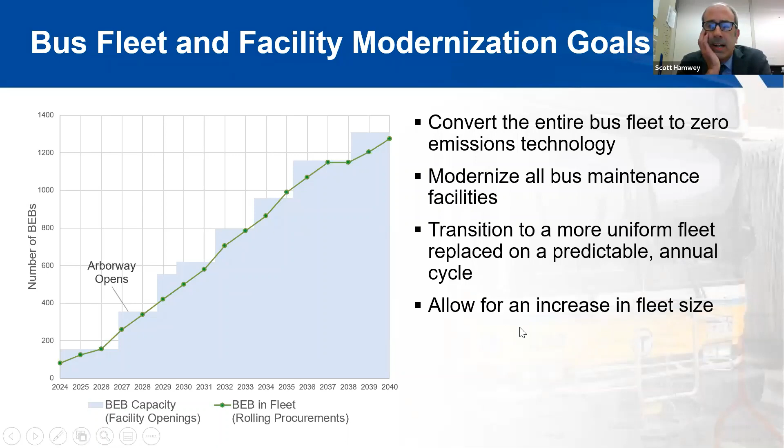So if we go to our next slide, we'll talk briefly about that electrification strategy. We're really excited about this, we're proud of it. It's one of the most aggressive bus electrification strategies in the nation. Like nearly all of our peers in North America, we've identified battery electric buses as the vehicle technology that's going to get us there.

What is this going to mean for the communities we serve? It means an almost total elimination of emissions compared with the CNG or diesel buses we operate today, with only a small amount of emissions in the initial years of this transition associated with the coldest days of the year, when we'll need to complement the bus's electric heating system with auxiliary systems. The MBTA's new renewables-only electricity contract means that 100% of MBTA electricity comes from renewable sources.

And like electric cars that many of you may be familiar with, these vehicles are also going to be much quieter, and that's going to really change the experience of living near one of these MBTA facilities. It's going to be a dramatically improved experience to have us as a neighbor.

If we go to the next slide, there are other ways in which the experience is going to be different than it has been historically. These images show our first project in the program, our battery electric bus facility in Quincy. The facilities we're building are really designed to be fully enclosed modern facilities.

So at Arborway and other locations, you'll see bus storage out in the open, and some maintenance activities out in the open. Those are all going to be occurring inside these new facilities that we're building.

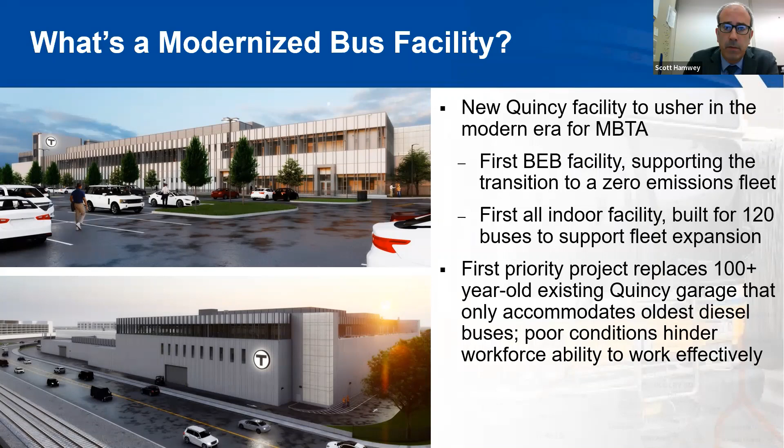So this is a really exciting first step for us, and we think it's really going to help us tell the story of what we're trying to do when we come to other communities like the Arborway community.

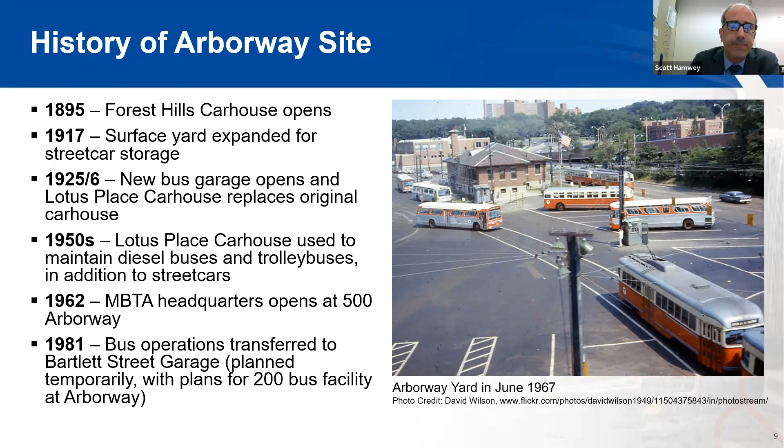So, next slide. The next phase of the history is probably, for some folks on the call, more frustrating than fun for many of you who've been involved. Alexandra and myself have not been directly involved with a lot of this history, but we thought it was important to recognize that we're definitely heading into this effort.

We're leading a project that can benefit from the decades of community interest and engagement that came before us. And also, given that funding proved to be a roadblock to advancing earlier concepts the MBTA had, we think it's absolutely critical that we take advantage of the opportunities presented today, particularly with federal infrastructure funding and grant opportunities associated with vehicle electrification projects.

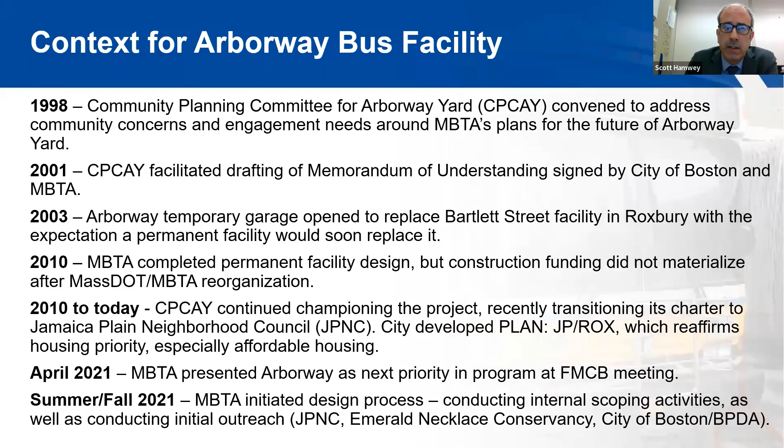The next slide talks about one of the big outcomes of the recent period of history and community engagement around the site: the 2001 MOU between the City of Boston and the MBTA. There were a number of provisions in that document, ranging from fleet size and makeup, parking, as well as the incorporation of the city's former pole yard into the site plan.

Before handing the baton off to Alexandra, I think I have one more slide to do.

So I'll just discuss our preliminary concept—she's going to discuss the site and the building. I just wanted to highlight some of the service impacts of our program for Arborway.

One big change here is we are proposing to increase the size of the fleet at Arborway from the current 118 bus fleet to a 200 bus fleet. In addition, this allows us to replace the current CNG fleet with battery electric bus technology, which will electrify all of the current routes out of Arborway.

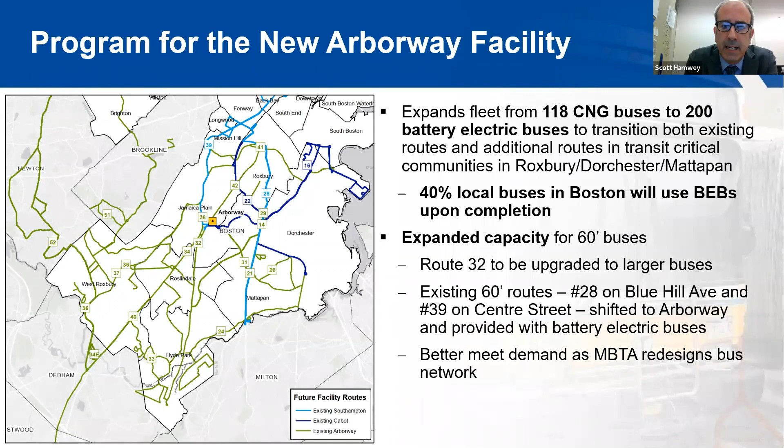So that's my portion of the presentation. With that, I'm going to hand it off to Alexandra to take us through the site plan and the facility itself. Sure, thanks, Scott.

I'll start with an orientation of the existing conditions. The site is split into two parcels, one on the Washington Street side and one on the Arborway side. On the Washington Street side, that's where we house our current CNG maintenance and storage operations. The storage occurs outside and the maintenance occurs in a number of buildings on the northern portion of the site. We have employee parking on the southern portion.

And then in the 500 Arborway site, we have our former headquarters where we still have a couple of functions, including our archive and materials lab. And to the east of our site is Boston's former pole yard, which I believe today functions as a zero waste facility where the community can drop off compost.

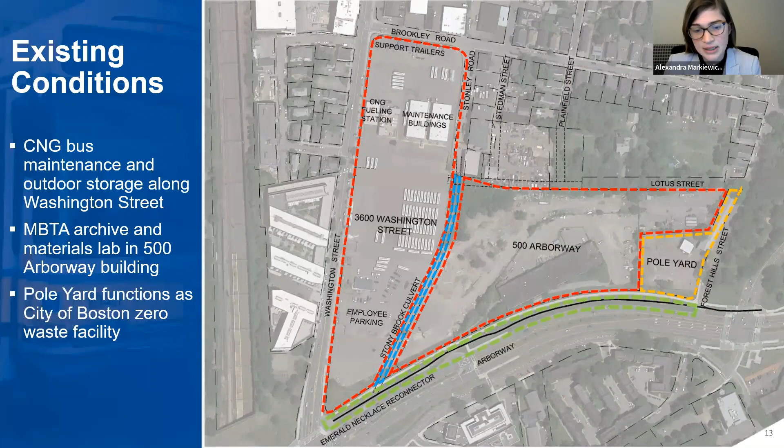There are a number of conditions on the site that serve as constraints or boundaries shaping how we're thinking about this preliminary concept. First, as Scott described earlier, these modern all-indoor facilities are quite different from what we've seen in the past, and they require a significant footprint, generally working best with a large, more rectangular shape. They're challenging to site on odd-shaped parcels.

With our existing site, we see that the Stony Brook culvert bisects the site along those parcel lines. We know we want to avoid building over that culvert because it would be challenging and expensive, and may even require moving the culvert.

We also know that during construction of the new facility, we want to maintain the existing operations so that we can keep buses on the road through the duration of construction. And this Washington portion of the site is the preferred portion for community uses. So that pushes us to looking at the Arborway side of the site for siting our new facility. We found that we need the full length and width of that site, including the pole yard, in order to meet the needs of a modern facility.

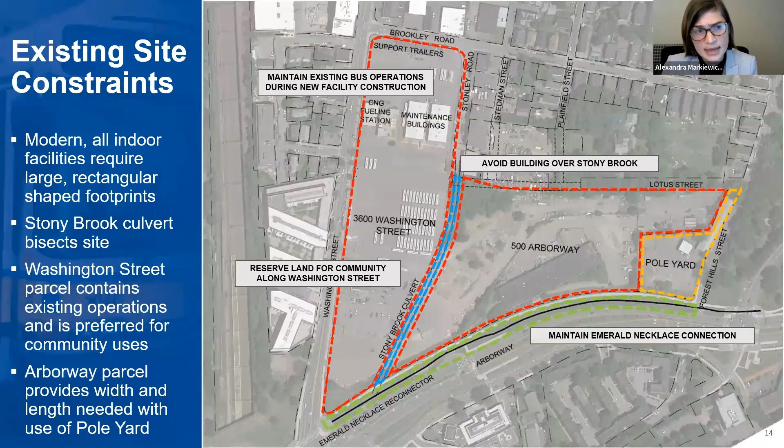Next slide. So over the next couple of slides, I'll talk through what our concept is from a couple of different perspectives, and I'll start with the outside and work our way down to details.

Since we're looking at the footprint on the eastern portion of the site, to the east of the culvert, that opens up a total of 8 acres for community uses that we've identified along that Washington Street portion of the site. We know this is wide enough for a couple of rows of development of different types of footprint that are in line with the types of uses we've seen identified in prior planning efforts, including

PLAN: JP/ROX. As part of this project, we're also planning to construct the Lotus Street extension, also identified in previous planning efforts. It would extend from Forest Hills Street to Washington Street as a two-way public right-of-way with sidewalks on both sides.

And then on the southern side of the site, we're looking at that Emerald Necklace connection that was made through the Casey Overpass project as a boundary as well, to ensure that we can preserve that connection.

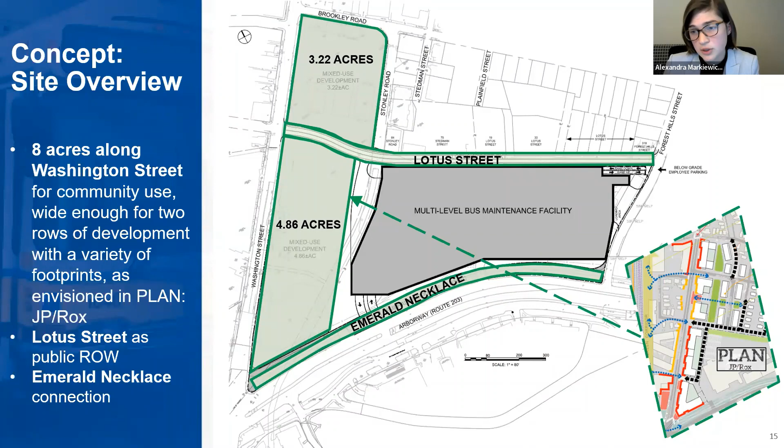Next slide, please. And so looking at our building, we're looking to house 200 buses in a building where we have the footprint outlined here on the slide in this concept.

Though it is quite large, we did work to minimize the footprint as much as possible by putting bus operations on 2 levels and putting all the parking underground, which also meets the MOU stipulation to not have parking on the surface. All operations will be indoors, including the queuing for buses coming in and out of the facility, which gives it this sort of odd, slightly off-from-a-rectangle shape.

We'll look at what that looks like on the inside on the next slide. By doing that, we're able to really maximize the energy efficiency and meet some of our sustainability goals for this building in terms of heating and building operations.

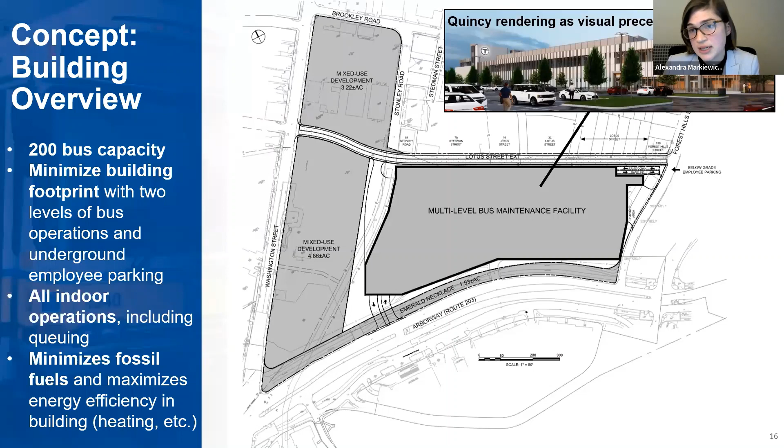We're just at the beginning of design, so we don't have the facade designed yet, but I wanted to pull back this image from Quincy just to show as a visual precedent for what a facade for this type of facility might look like.

Next slide, please. In terms of the interior, we wanted to give folks a sense of the inner workings of this facility, how we would make use of it, and why we need this type of footprint.

The buses would come in and out off of Arborway in the southwestern corner of the facility, and all the operations would occur on a counterclockwise basis, which is best for our bus operations.

They would pass through service lanes on the southern portion of the building, and then we have the maintenance space on the first floor on the eastern side of the building, on the right of the screen, where we'd have pull-through bays for our 60-footers so they wouldn't have to back up, and back-in bays for our 40-foot buses.

And then on the western two-thirds of the building on the first floor, and the entirety of the second floor, which we would have ramps going up and down to, we'd have space for bus storage for 60-footers and 40-footers, as well as the bus charging, which would occur where they're stored.

We're siting the administrative needs for this type of facility—locker rooms, offices, inspectors, etc.—along the northern edge of the facility that backs up to the community there, as well as some additional space for administrative needs along Arborway.

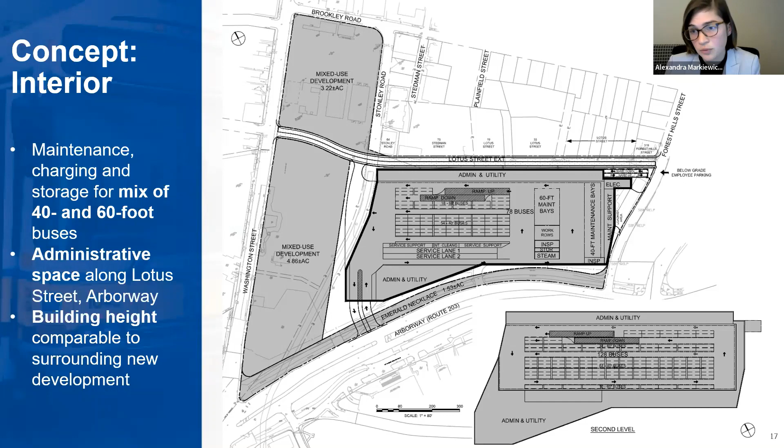So I talked about this a little bit on the prior slide, but in terms of access, we are looking at Arborway as being the primary access point for buses. However, we know there are some challenges with the existing intersection between Arborway and Washington Street for ensuring all our buses can turn left down Hyde Park Ave to get to the lower upper busway at Forest Hills.

We'll be working with the city to identify what type of improvements might be made to help meet our operational needs. Pending the outcome of that discussion, we will determine exactly how we might make use of the Lotus Street, Washington Street intersection as a secondary access point, whether it could be solely emergency access or might need to be something additional.

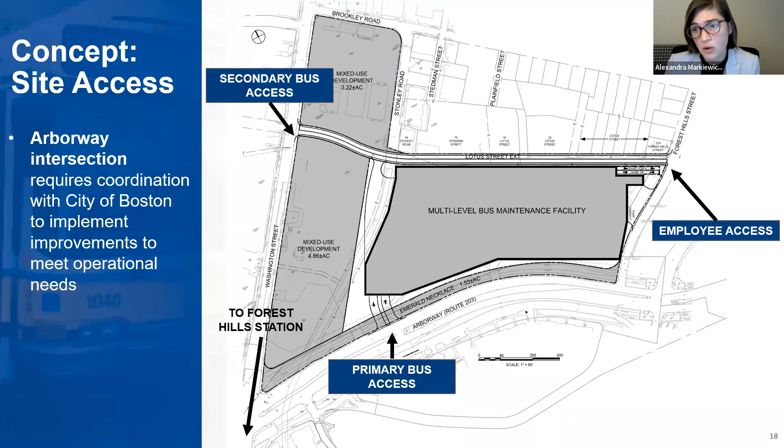And then we'd look to Forest Hills Street as the access point for our employees to get to the underground parking garage. So I just wanted to wrap up with a little bit more detail on the electrification piece, as some folks in the room might be interested.

They would essentially orchestrate the charging so that we could manage the energy demands for charging 200 buses overnight, but also make sure that we can meet our service needs in the morning.

We're working with the utility already, and we'll be working with them closely over the next couple of years to identify the upgrade that would be needed in order to make sure we have enough power to charge 200 buses, as well as looking to evaluate some opportunities for supplemental charging, kind of like top-off charging, that could occur at other key points in our network where buses meet over the course of a day.

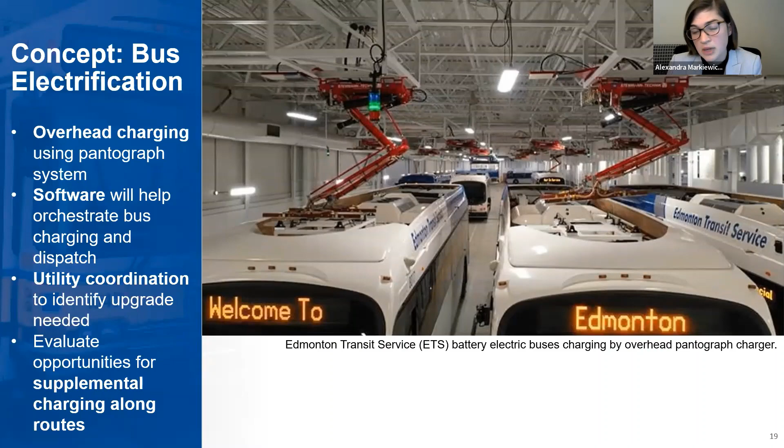And I think that's all, and I'll just turn it back to Scott to wrap up with our next steps.

Thanks, Alexandra. Appreciate that, and also want to recognize Representative Holmes, who joined us somewhere along the line there. Thank you for joining us, Representative.

So where we are in the process now, we're kicking off the public facing side of this. We've started our 0 to 15% design process, which Alexandra just shared the preliminary outputs from. There's some initial exploratory work we have to do with any construction project. There'll be some borings happening out on the site, probably starting in the next couple of weeks, so you might see some activity out there associated with early exploratory information gathering on the site.

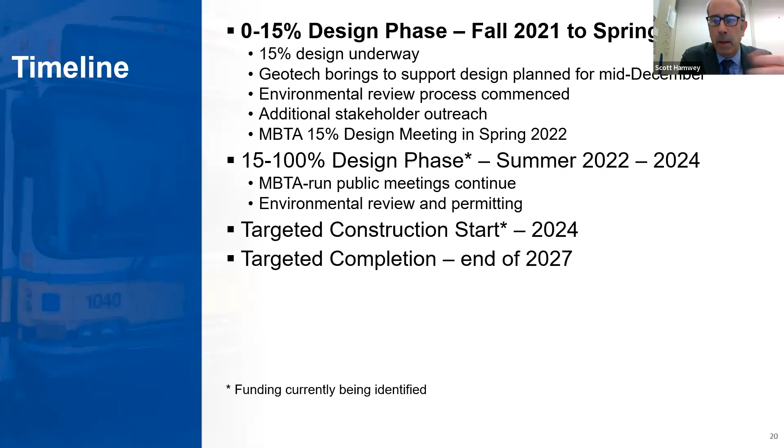We're going to be commencing our environmental review process, the MEPA and NEPA processes. I want to emphasize that while the MBTA will typically come out and do a large format public meeting like this, hopefully in the not too distant future in person with all of you, but until then remote, the next design threshold for that would be at the 15% mark in the spring.

Alexandra and I and the team are certainly interested in coming out and speaking with folks about this project, answering more specific questions folks might have. Just reach out, our contact information's on the next slide, and we're happy to try to fit into any existing agendas that the different groups out there might have. Happy to do that over the winter, so we won't go away entirely until that next meeting.

And then starting the middle of next year, we would roll into our final design phase. At the MBTA, we have a 30% design, then a 75% design, and then the final design. That process is going to take us close to 2 years, starting next summer. We'll be going out to bid to get a new designer for that.

We do have asterisks here because our capital plan, which for the last several years has kind of been a year-to-year exercise. We do need to secure the final design funding for the project to keep the project rolling, but we're optimistic that we're going to be able to do that.

Continue to have these types of meetings during that period. We'll be finishing our state and federal environmental review process during that time.

Our goal, again pending funding, would be to start construction on this facility in 2024, right around when the MBTA will be wrapping up work on our first modern facility at Quincy. The goal is to complete this by the end of 2027. It's an aggressive schedule, but one we're going to try to meet.